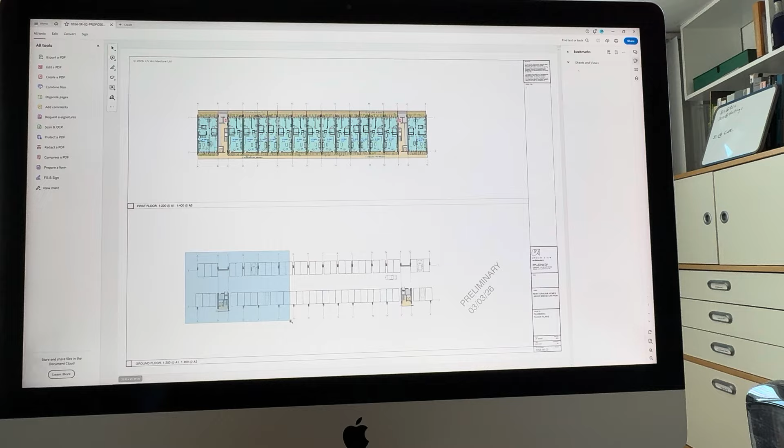We've got these walls here, going this way and going this way around the stair core. That's going to provide the rigidity. The engineer might not need it, but anyway, it's there as a just in case.

So fit, come up to here. We've got the three bedder at the end, and then we're running with three person two bedders and one person one bedders. That works best with the parking layout.

Also, I think that's better. I think the 50 square metre one-beds are just way too big - you and I discovered that on Canning Town. I think the three person two-beds are much better use of space to get basically starter families, but also someone could have a little office running next to the bedroom with a couple. It's just more suitable for a modern way of living, and it's going to give us better numbers as well. So let's just fit that one.

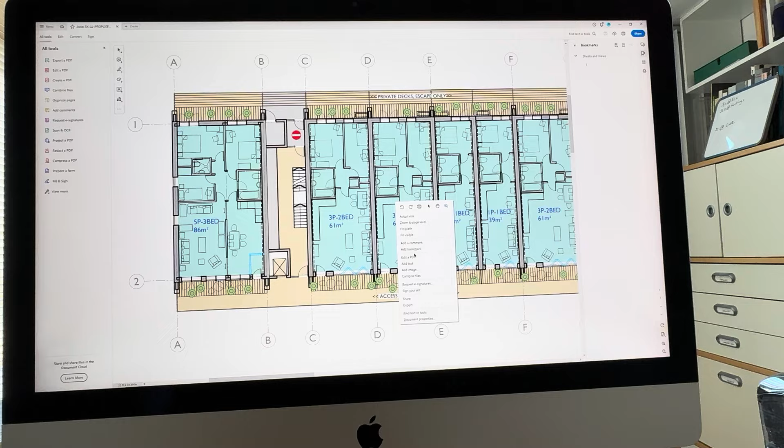Right, let's just come to the model. So this is what it looks like. Oh, by the way, this is Bridge Car Park.

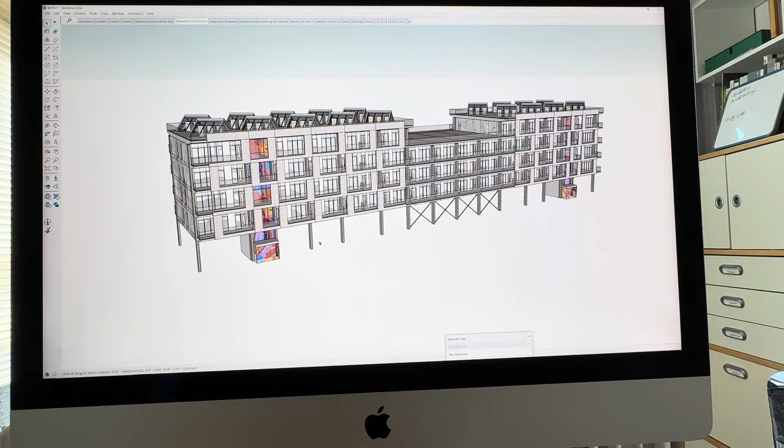Just because it's more closely worked up, we'll be able to take the pound per square feet build costs from this and use it on Derby. So you can see, very simple. I'm showing some sort of solar panel thing on the roof - it doesn't need to be fancy things like this.

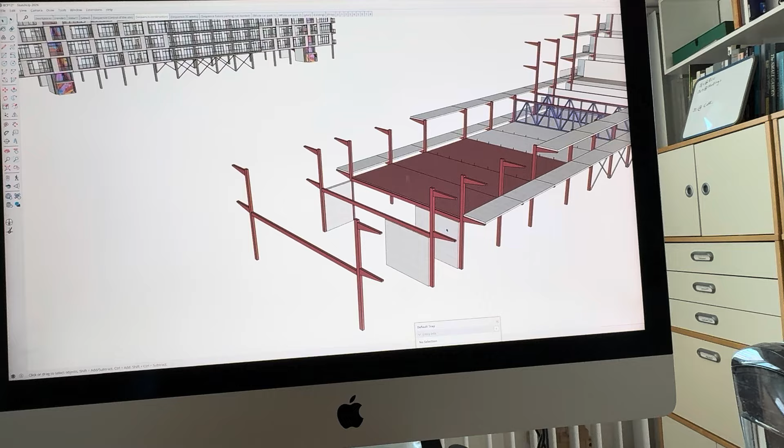So what we're doing is these are the steel columns, they're 2 stories, and there'll be a small beam tying them together. Those are the walls to the core - that gives it a bit of stability. Also, this bracing here gives it stability.

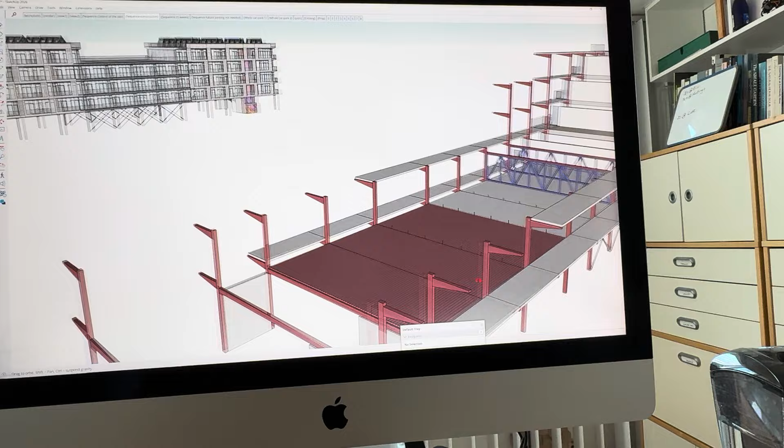We then got this is the crinkly tin that goes straight onto the beam, and that beam will have - what happens is these bolts get welded through to create a continuous piece of steel. It makes it very, very strong and very rigid.

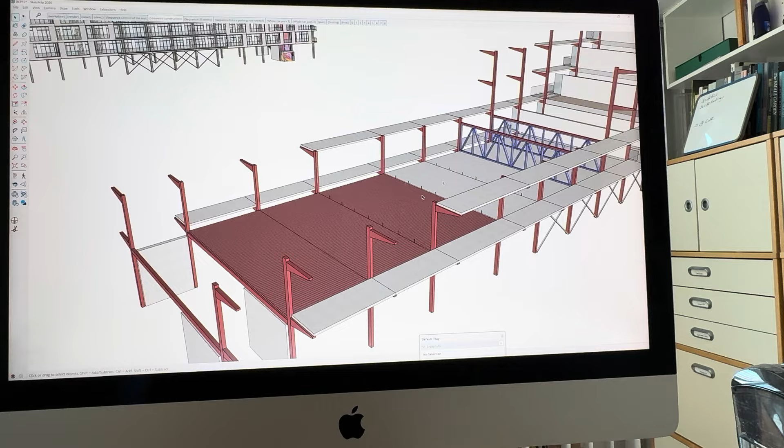These bolts will give us something to fix down to for the subcontractors. So here we're showing these are the bolts sticking through the screed, and then this purpley stuff, that's just to show it different. That's the Metsec, for example.

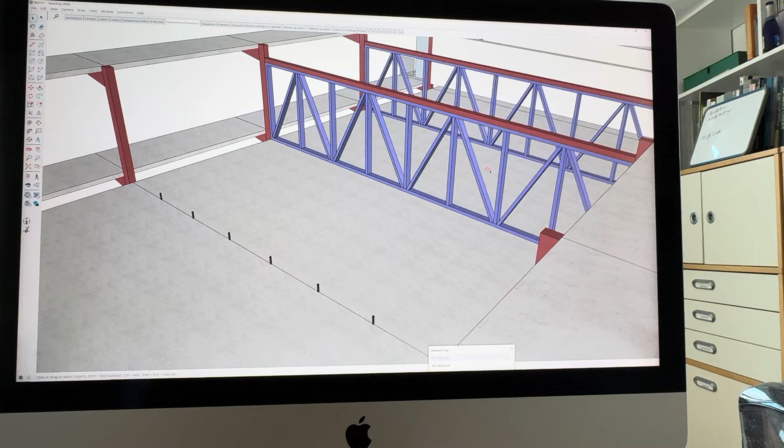Now this could be timber frame. This is the truss concept, but you can see it's literally just like a stud wall with a bit of bracing, and we'll leave that to the engineer. The subcontractors' engineers will be able to sort that out with ours to make sure the overall strength works.

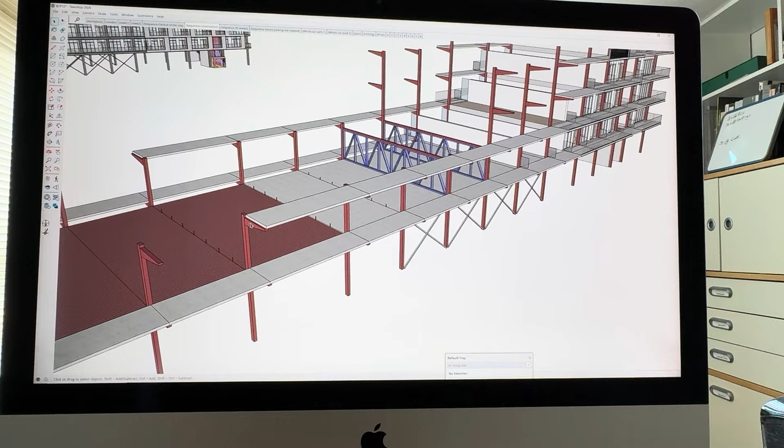But that's basically how the whole thing works. These are hollow core panels that sit on these cantilever bits. These columns, they may turn up from the factory with these things bolted on or welded on. They're quite easy to transport - it's that, I imagine that'll be how it works.

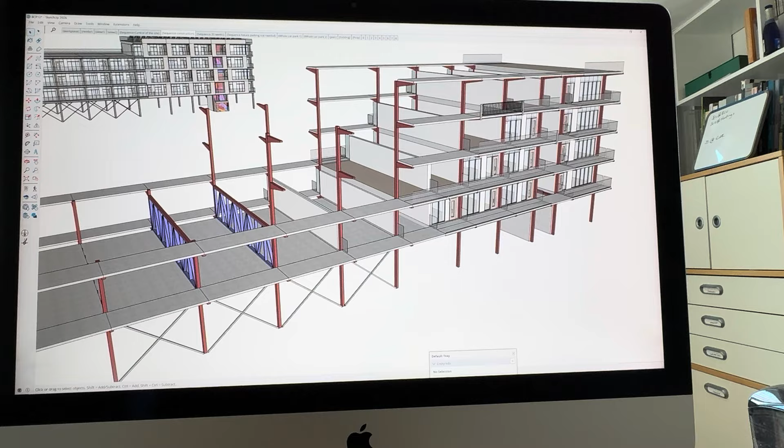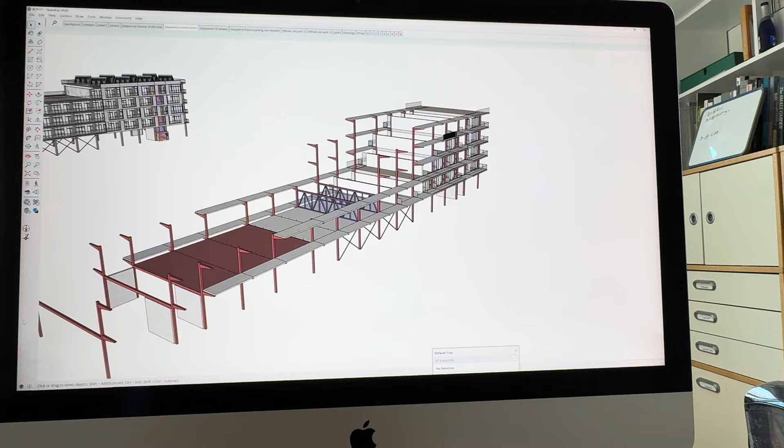We then extend the columns as we go up the building, and I haven't shown - it's obviously all the manufacturers will have different ways of filling these in. I mean, it could be that we don't need any of these beams and decks and crinkly decks. The panel, the category 1 volumetric and the category 2 panel and pod, they both may be able to just happily fix into these, drop their panels and bits and pieces into these columns.

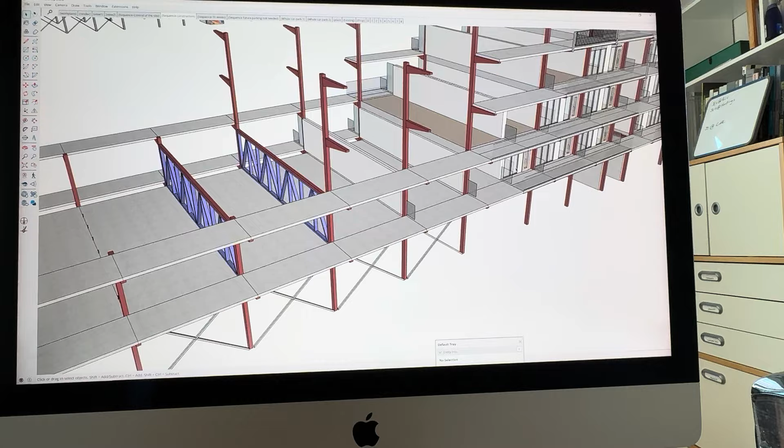Might not even need this beam, but what we're doing for now is this is how we're creating a working deck, where you can basically build off. Here we're showing the party walls being finished off, and then we just sort of go up the building like that basically.

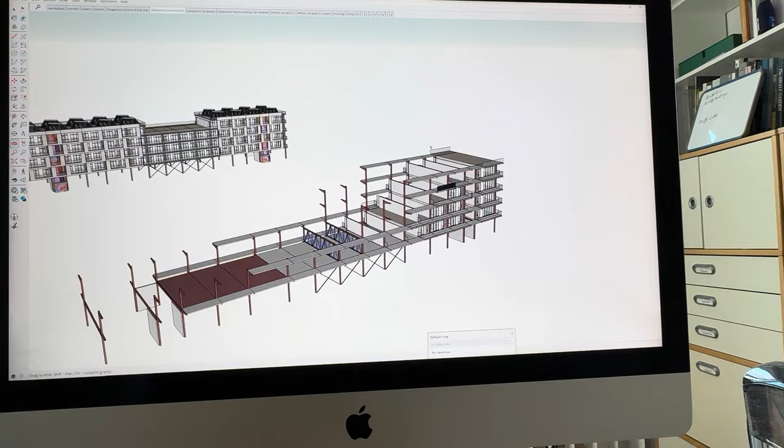Now, in terms of the roof, in my experience, most prefab manufacturers make their own roof cassettes. So these roof cassettes would just sort of come out of the factory like that. We could do the same thing again and have a beam at the top, but I don't think that's probably necessary. We're starting to have a little look at the construction details here.

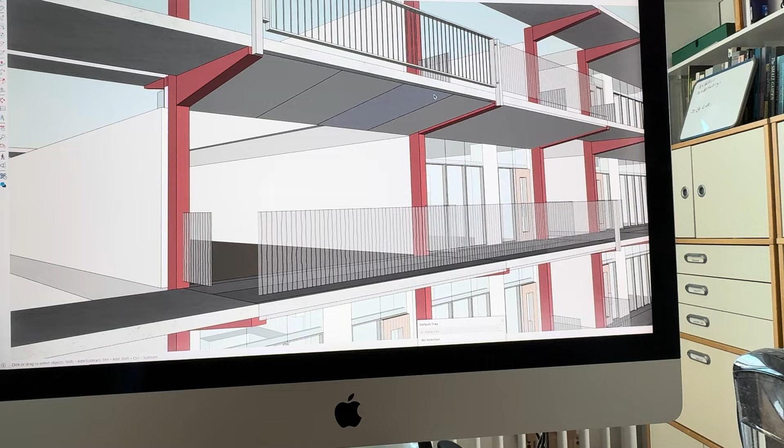So it could be that the underside - because I think the underside of the hollow core, we'll need to light that - and I'm showing 4 panels. This is a, where are we, 4 foot by 8 foot, just a standard panel. And it can be a concrete panel painted white. Can have some lights fitted to that, or just at the edges, nice and easy, very simple detail.

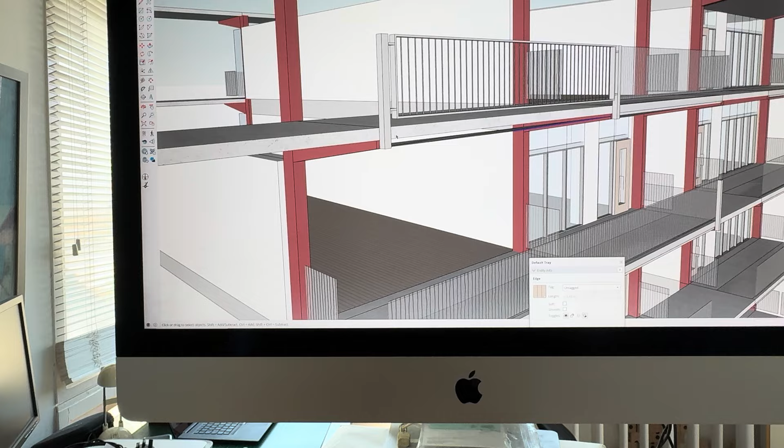Just having a little look at how the railings fit, because we'll need - you'll recall I was talking about a drip detail - and that'll just be a flat piece of edge that protrudes down a little bit here, so that water coming off drips down. It doesn't start pissing down this sloping ceiling or the edge here, and that's a standard detail.

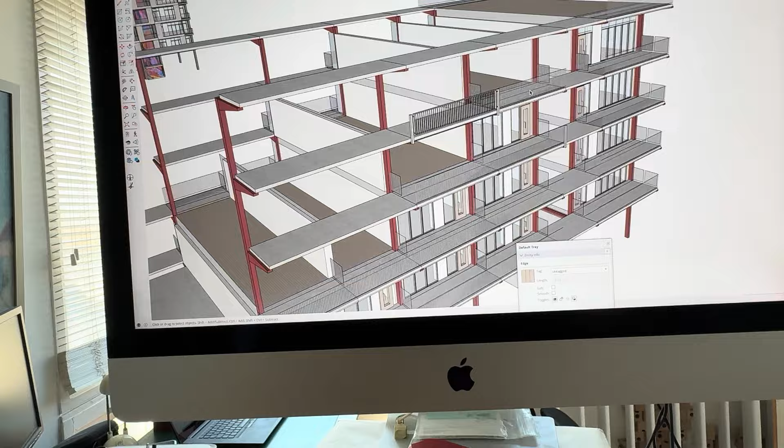So that's pretty much how I think it's best to work. We obviously get all this onto drawings, but I think, you can see, I've saved myself a lot of time with the boys on the drawings, getting this information to you.